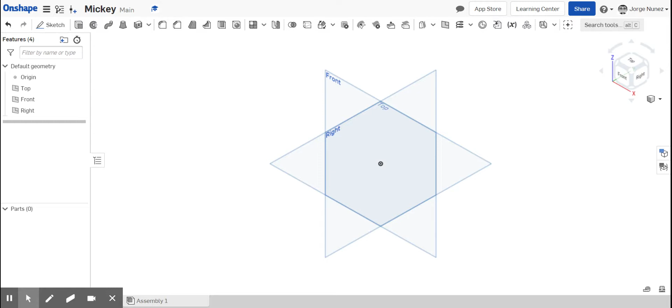Okay guys, for your assignment today I'm going to be asking you guys to use the mirror tool to create the little Mickey Mouse shape. We're all familiar with the Mickey Mouse shape, right? It's basically three circles, two for the ears and one for the face. I'm going to show you how to do that using OnShape. It'll be very basic, going into the mirror tools available to you, and you're going to be turning those in for credit.

So you're going to start a sketch. I'm going to select the front plane to be my sketch plane. Then I'll click on the front, right click, and select view normal to sketch plane. Now I'm actually able to start sketching on that plane.

To start off the face, I'm going to make a vertical line starting at the origin, so basically make it go up and down. Don't worry about dimensions right now. I'll hit escape, select the dimension tool, and dimension that to be exactly 1 inch. So now I have that 1 inch vertical line starting at the origin.

Now I'm going to use the 3-point arc tool on the top left and select that. I'll start at the end of the line and at the other end of the line, then extend that out to about 1/2 inch. If you can get it exactly 1/2 inch, that's great. If not, you can always dimension it. So if I hit escape and dimension this, just double check to make sure it's exactly 1/2 inch. Right now it's not exact, as you can see, I thought I had it, but it's not. You could always go ahead and dimension that to be exactly what you want, in this case 1/2 inch.

Now that I have that dimensioned to 1 inch and then 1/2 inch radius, I'm going to use the 3-point circle tool. Notice that next to center point circle there's a drop down menu, and one option says 3-point circle. I'll use that tool so I can make it right there on the edge where the little ear should be. So I'll select the edge about where you want the ear to be for the little Mickey, and then you'll need two other points.

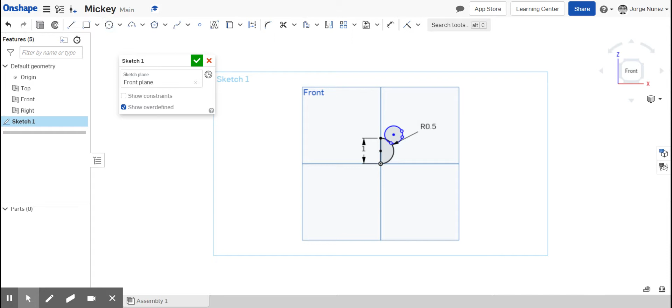The mirror tool is right here on top. On the 2-dimensional sketch plane where it says mirror, you can actually mirror an image and flip it over. If I select that, it's going to ask me to select the mirror line. The mirror line will be the vertical line that I just sketched. So I'll select the vertical line, and then I also want to mirror the entities, in this case the ear and the head.

And then after that, what I want you guys to do is to extrude it to basically 0.5 inches and then turn that in, exporting it as an STL for credit.

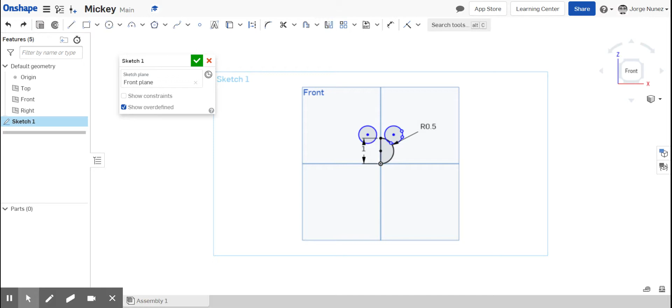Now, before you do it that way, if you want to learn a different way of doing it, I'm going to show you guys how using the 3-dimensional mirror tool. So once I have this like this, I'm going to say okay, I'm happy with it, that's exactly what I wanted. Done. So now I'm going to extrude this, these surfaces here, basically having them as one single object.

And I'm going to change that from 1 inch to 0.5 inches, or 1/2 inch, and select that, okay. So there you go, I have my 3-dimensional shape, which is basically half of Mickey. But I don't want half of Mickey, I want full Mickey. So now this is my 3-dimensional solid, right?

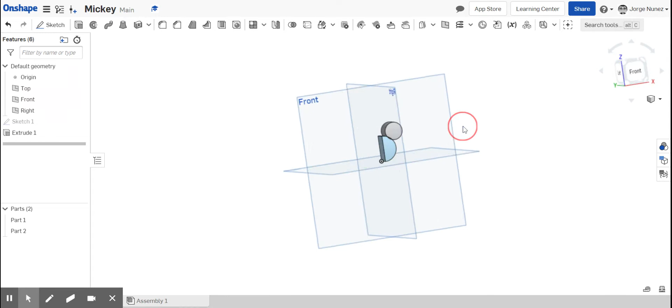I still have a mirror tool available to me, it's actually up there - one of the options says mirror. I want to mirror these two faces so it can be the same thing on the other side. Right next to linear pattern, there's mirror. For entities to mirror, I'm going to select this one and this one. Oh, excuse me, it's asking for a mirror plane.

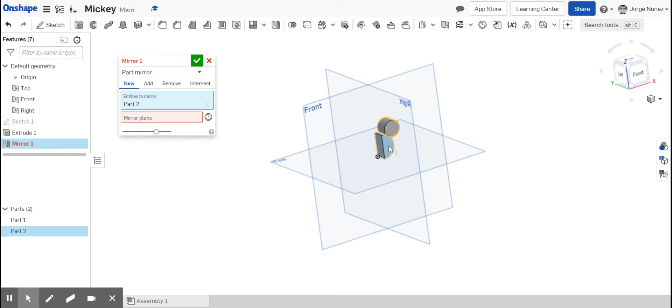Okay, so I'm just going to redo it just so you guys can see really quick. I'm going to select the little mirror tool right here on top. Now it's waiting for you to tell it what you want to mirror. I want to mirror this shape, which is the ear, and I want to mirror this shape, which is half of the face.

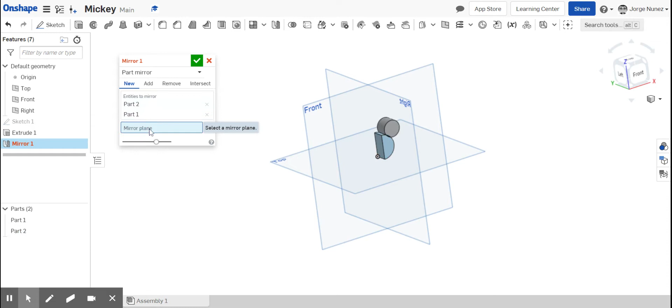It's going to ask you which plane you want to mirror it on. As you can see, the one that is vertical according to that line is actually the right plane - that's the plane that's cutting it in half. So I'm going to go on the left-hand side on my feature tree and select the right plane. I'll click on mirror plane, then select right, and it should mirror the three-dimensional shape on the other side of that sketch plane.

And then once I'm happy with it, I select OK, and now I have my little Mickey Mouse shape. So as always, you can right-click, export as STL, and that's what I want you guys to turn in for your assignment. Okay, thank you guys, see you on the next one.